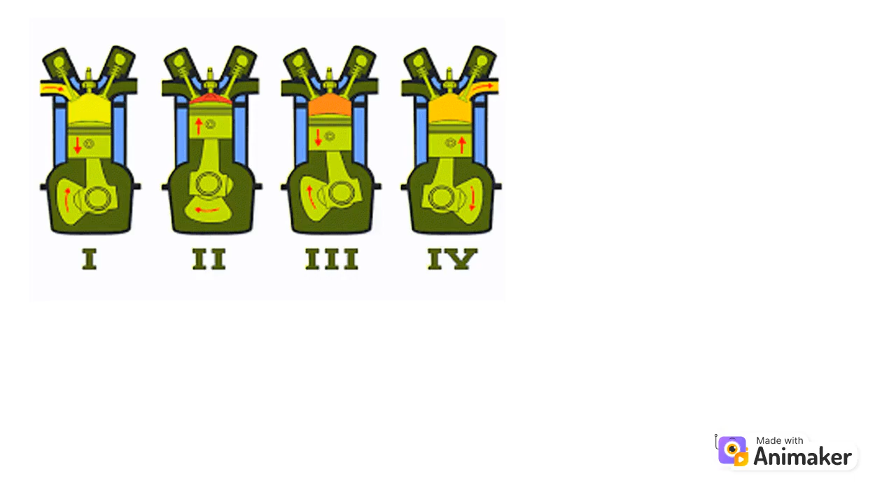Also known as four-cycle, this is an internal combustion engine in which the piston completes four separate strokes which comprise a single thermodynamic cycle. A stroke refers to the full travel of the piston along the cylinder, in either direction. The four separate strokes are termed intake, compression, power, and exhaust.

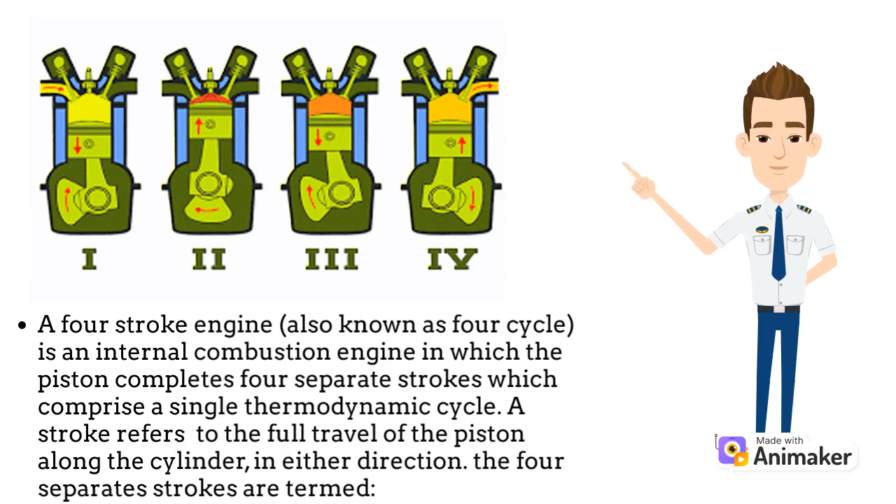This stroke of the piston begins at top dead center. The piston descends from the top of the cylinder to the bottom of the cylinder, increasing the volume of the cylinder. A mixture of fuel and air is forced by atmospheric or greater pressure into the cylinder through the intake port.

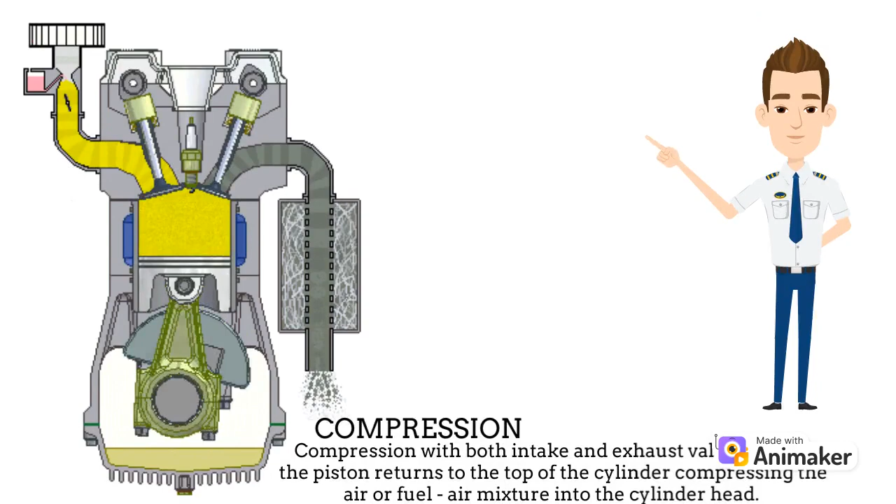Compression. With both intake and exhaust valves closed, the piston returns to the top of the cylinder, compressing the air-fuel mixture into the cylinder head.

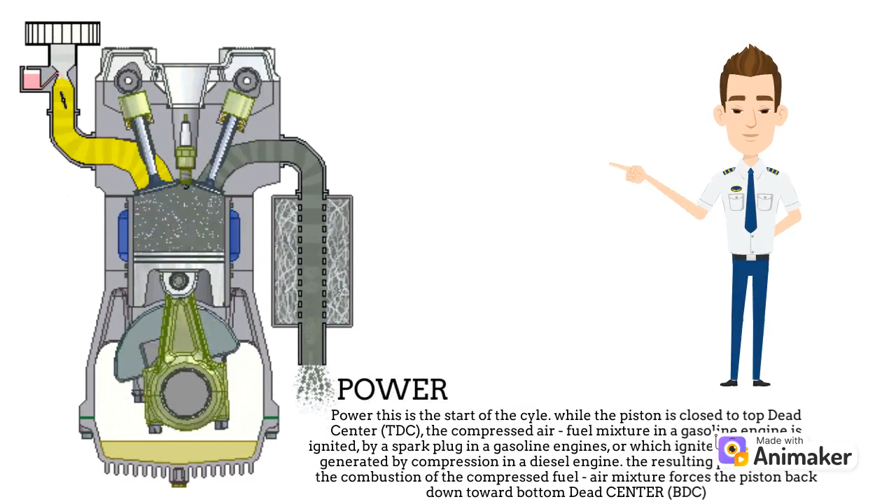Power. This is the start of the second revolution of the cycle. While the piston is close to top dead center, TDC, the compressed air-fuel mixture in a gasoline engine is ignited by a spark plug, or ignites due to the heat generated by compression in a diesel engine. The resulting pressure from the combustion of the compressed fuel-air mixture forces the piston back down toward bottom dead center, BDC.

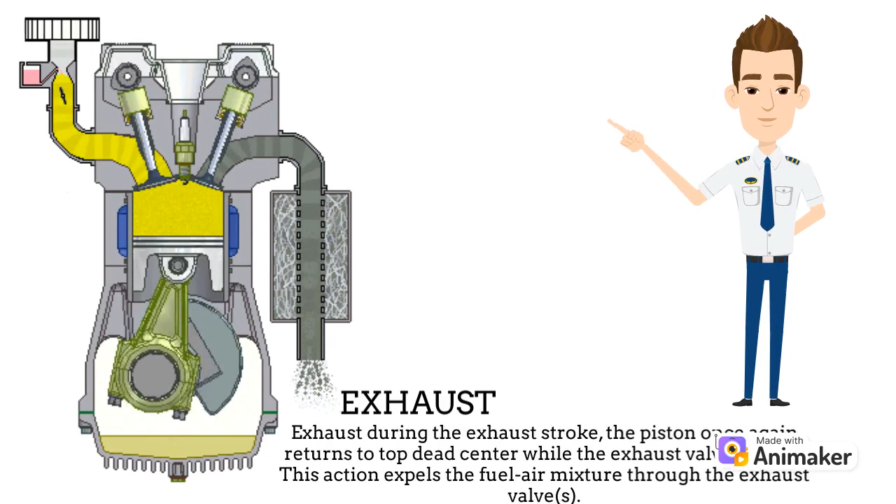Exhaust. During the exhaust stroke, the piston once again returns to top dead center while the exhaust valve is open. This action expels the spent fuel-air mixture through the exhaust valves.

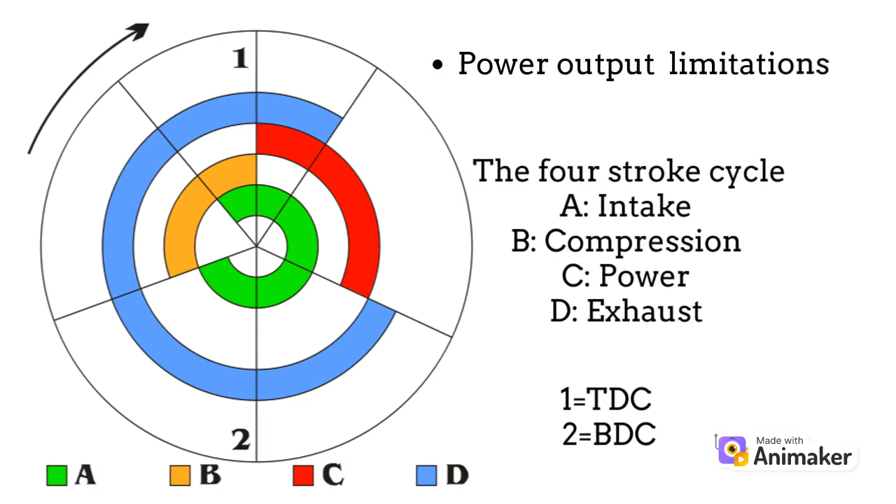Power output limitations. The four-stroke cycle: A, intake; B, compression; C, power; D, exhaust. The maximum amount of power generated by an engine is determined by the maximum amount of air ingested.

The amount of power generated by a piston engine is related to its size, cylinder volume, whether it is a two-stroke or four-stroke design, volumetric efficiency losses, air-to-fuel ratio, the calorific value of the fuel, oxygen content of the air, and speed, RPM. The speed is ultimately limited by material strength and lubrication.

Valves, pistons and connecting rods suffer severe acceleration forces. At high engine speed, physical breakage and piston ring flutter can occur, resulting in power loss, even engine destruction.

Piston ring flutter occurs when rings oscillate vertically within the piston grooves they reside in. Ring flutter compromises the seal between the ring and the cylinder wall, which causes a loss of cylinder pressure and power if an engine spins too quickly.

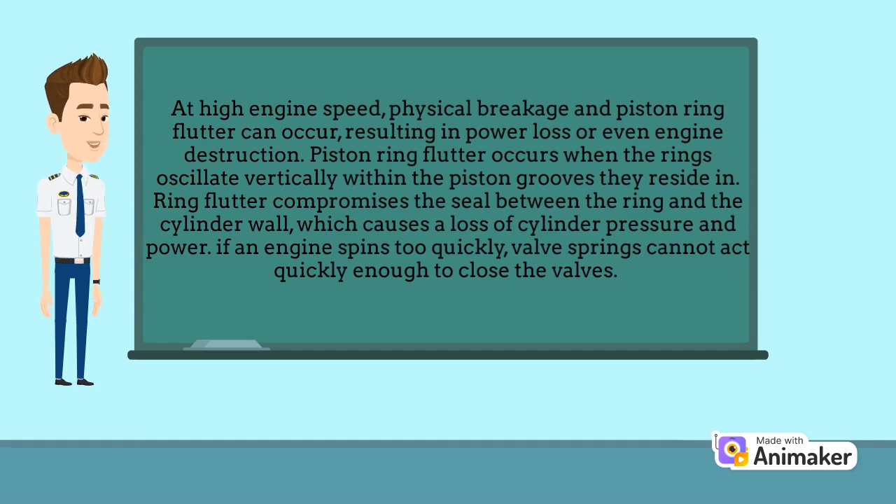Valve springs cannot act quickly enough to close the valves. This is commonly referred to as valve float, and it can result in piston-to-valve contact, severely damaging the engine.

At high speeds, the lubrication of the piston-cylinder wall interface tends to break down. This limits the piston speed for industrial engines to about 10 meters per second.

Intake/exhaust port flow. The output power of an engine is dependent on the ability of intake air-fuel mixture and exhaust matter to move quickly through valve ports, typically located in the cylinder head.

To increase an engine's output power, irregularities in the intake and exhaust paths, such as casting flaws, can be removed, and with the aid of an airflow bench, the radius of the valve port turns and valve seat configuration can be modified to reduce resistance. This process is called porting, and it can be done by hand or with a CNC machine.

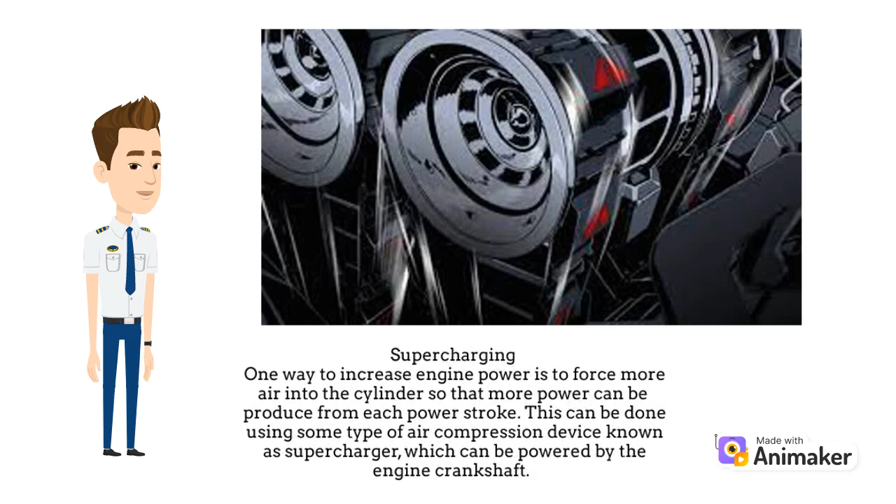Supercharging. One way to increase engine power is to force more air into the cylinder so that more power can be produced from each power stroke.

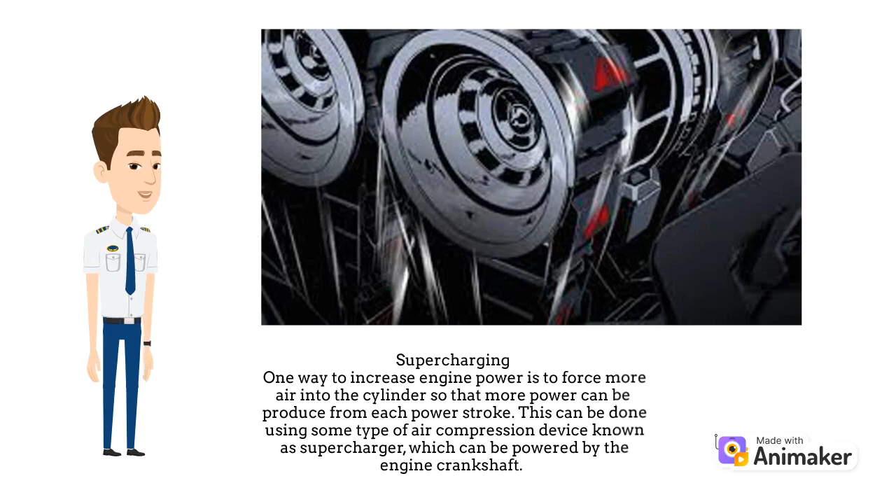This can be done using some type of air compression device known as a supercharger, which can be powered by the engine crankshaft. Supercharging increases the power output limits of an internal combustion engine relative to its displacement.

Most commonly, the supercharger is always running, but there have been designs that allow it to be cut out or run at varying speeds relative to engine speed.

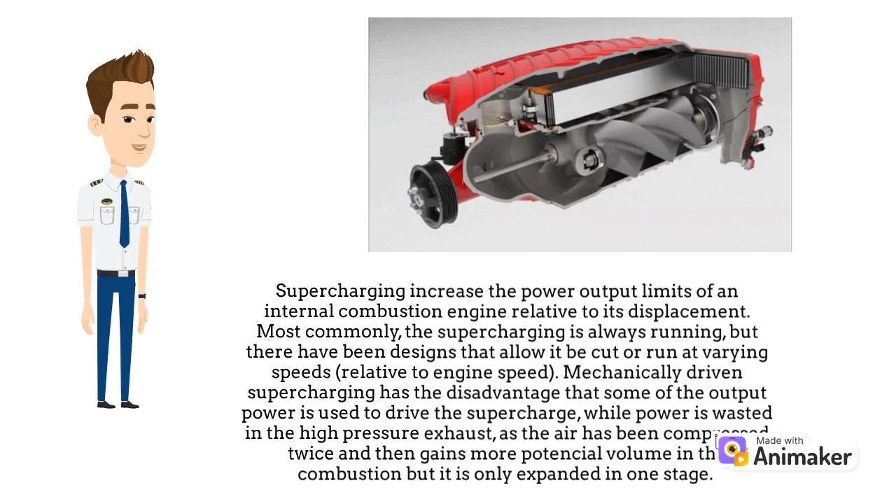Mechanically driven supercharging has the disadvantage that some of the output power is used to drive the supercharger, while power is wasted in the high-pressure exhaust as the air has been compressed twice and then gains more potential volume in the combustion, but it is only expanded in one stage.

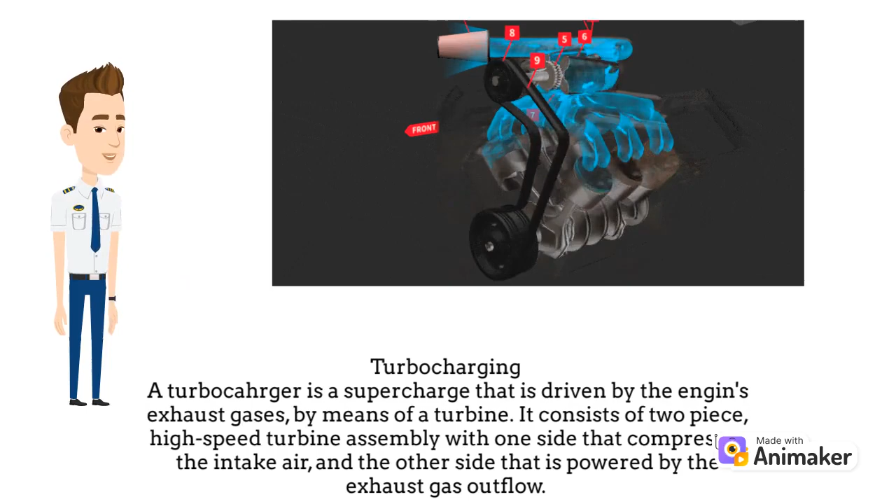Turbocharging. A turbocharger is a supercharger that is driven by the engine's exhaust gases by means of a turbine. It consists of a two-piece, high-speed turbine assembly, with one side that compresses the intake air, and the other side that is powered by the exhaust gas outflow.

When idling, and at low to moderate speeds, the turbine produces little power from the small exhaust volume. The turbocharger has little effect and the engine operates nearly in a naturally aspirated manner.

When much more power output is required, the engine speed and throttle opening are increased until the exhaust gases are sufficient to spin up the turbocharger's turbine, compressing much more air than normal into the intake manifold.

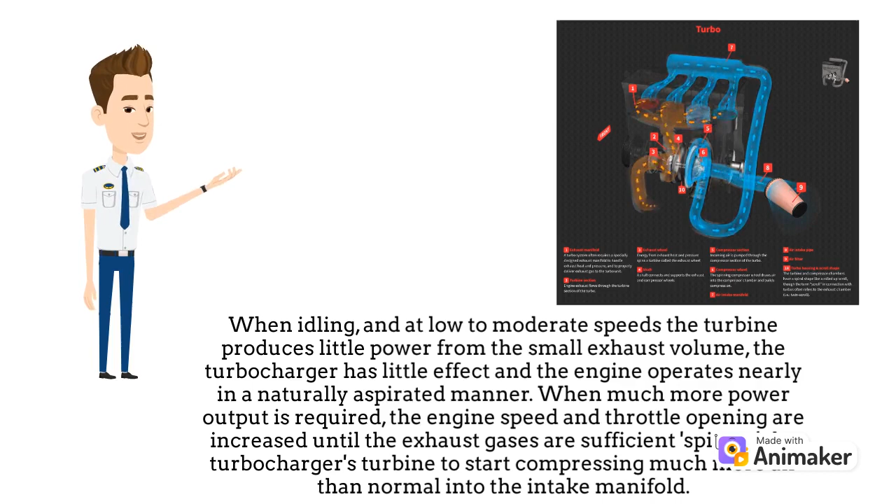Turbocharging allows for more efficient engine operation because it is driven by exhaust pressure that would otherwise be mostly wasted. But there is a design limitation known as turbo lag: the increased engine power is not immediately available due to the need to sharply increase engine RPM to build up pressure and to spin up the turbo, before the turbo starts to do anything useful.

Increased exhaust spins the turbo faster, and so forth until steady high power operation is reached. Another difficulty is the higher exhaust pressure causes the exhaust gas to transfer more of its heat to the mechanical parts of the engine.

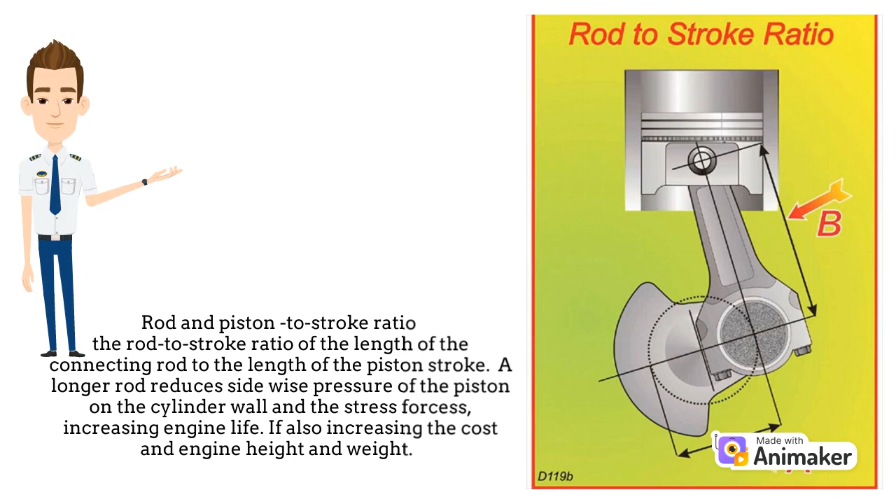Rod and piston to stroke ratio: the rod to stroke is the ratio of the connecting rod length to the length of the piston stroke. A longer rod reduces sidewise pressure of the piston on the cylinder wall and the stress forces, increasing engine life. It also increases the cost and the engine height and weight.

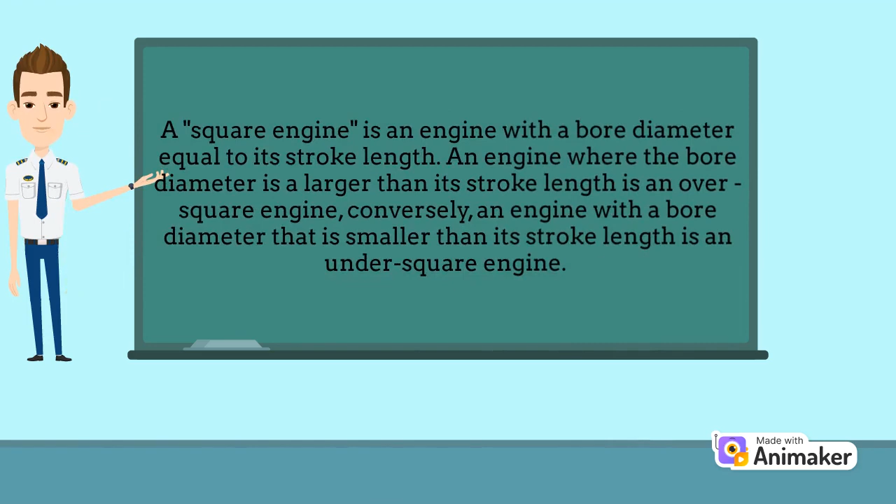A square engine has a bore diameter equal to its stroke length. An engine where the bore diameter is larger than its stroke length is an over-square engine. Conversely, an engine with a bore diameter that is smaller than its stroke length is an under-square engine.

Valve train: the valve train is typically operated by a camshaft rotating at half the speed of the crankshaft. It has a series of cams along its length, each designed to open a valve during the appropriate part of an intake or exhaust stroke.

A tappet between valve and cam is a contact surface on which the cam slides to open the valve. Many engines use one or more camshafts above a row or each row of cylinders, as in the illustration, in which each cam directly actuates a valve through a flat tappet.

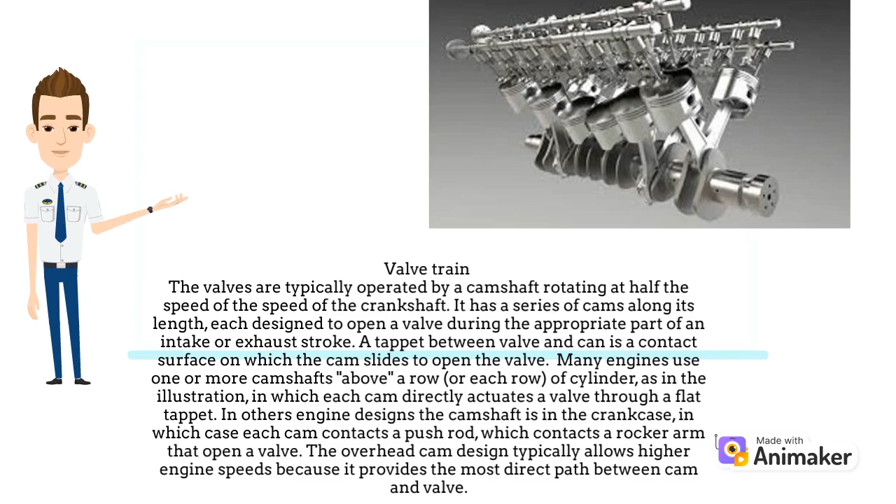In other engine designs, the camshaft is in the crankcase, in which case each cam contacts a push rod, which contacts a rocker arm that opens a valve. The overhead cam design typically allows higher engine speeds because it provides the most direct path between cam and valve.

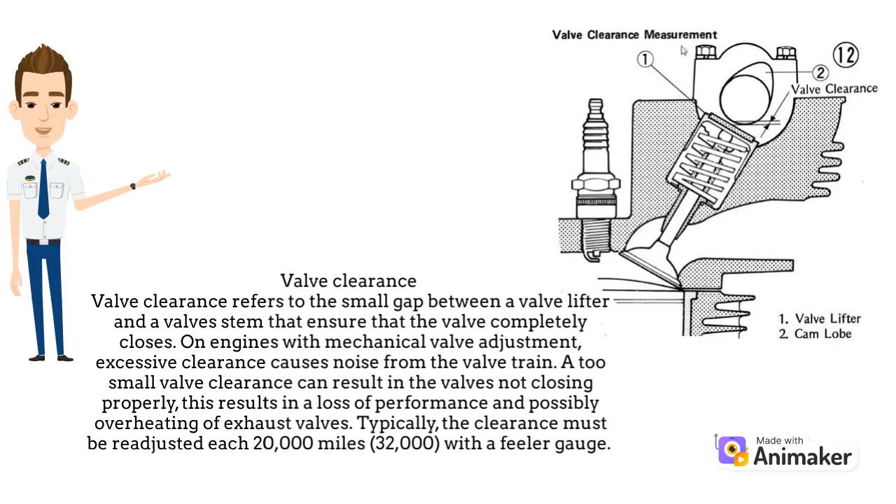Valve clearance refers to the small gap between a valve lifter and a valve stem that ensures the valve completely closes. On engines with mechanical valve adjustment, excessive clearance causes noise from the valve train. A too small valve clearance can result in the valves not closing properly. This results in a loss of performance and possibly overheating of exhaust valves. Typically, the clearance must be readjusted every 20,000 miles, 32,000 kilometers, with a feeler gauge.

Most modern production engines use hydraulic lifters to automatically balance clearance. Otto engines are about 30% efficient - in other words, 30% of the energy generated by combustion is converted into useful rotational energy at the output shaft of the engine, while the remainder is lost due to waste heat, friction, and engine accessories. There are a number of ways to recover some of the energy lost to waste heat.

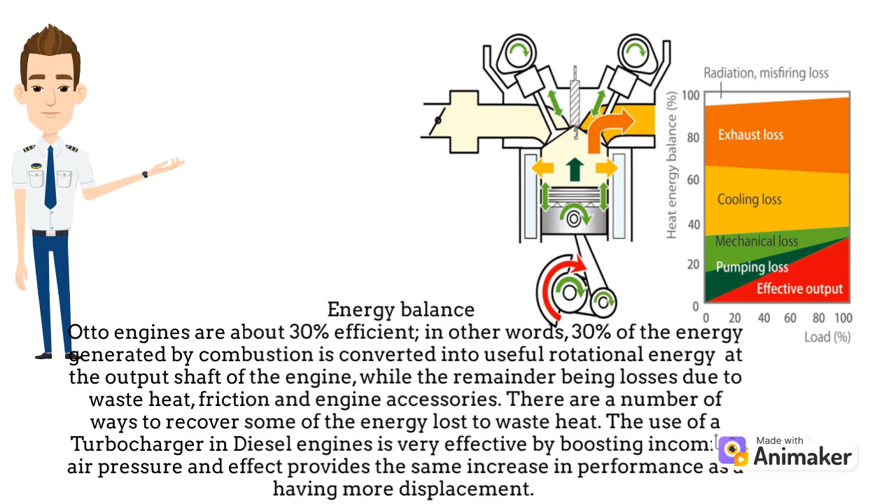Use of a turbocharger on diesel engines is very effective, boosting incoming air pressure and in effect providing the same increase in performance as having more displacement.

The Mack Truck Company, decades ago, developed a turbine system that converted waste heat into kinetic energy that it fed back into the engine's transmission.

In 2005, BMW announced the development of the Turbosteamer, a two-stage heat recovery system that recovered 80% of the energy in the exhaust gas and raises the efficiency of an auto engine by 15%. By contrast, a six-stroke engine may reduce fuel consumption by as much as 40%.

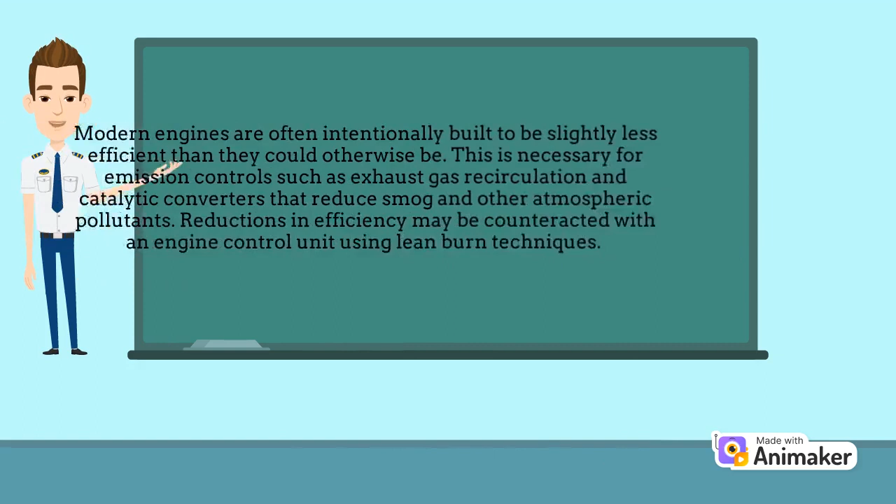Modern engines are often intentionally built to be slightly less efficient than they could otherwise be. This is necessary for emission control, such as exhaust gas recirculation and catalytic converters that reduce smog and other atmospheric pollutants. Reductions in efficiency may be counteracted with an engine control unit using lean burn techniques.

In the United States, the Corporate Average Fuel Economy mandate requires that vehicles must achieve an average of 35.5 miles per gallon (mpg), compared to the current standard of 25 miles per gallon. As automakers look to meet these standards by 2016, new ways of engineering the traditional internal combustion engine (ICE) will have to be considered.